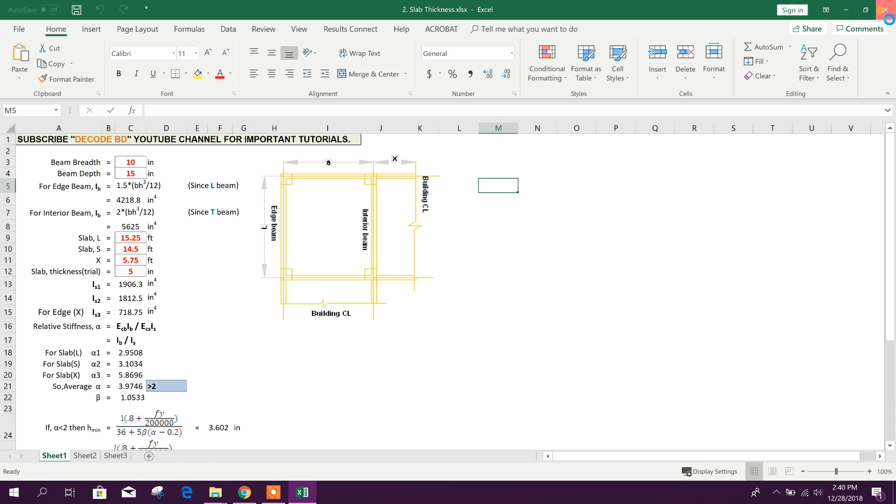Here's this one, checklist for ETABS. Number 2, determination of slab thickness. Number 3, water tank load calculation. All these Excels I have used in my tutorials. Wind load calculation. Here this one is a little bit updated for 0 degree and 90 degree according to ETABS input.

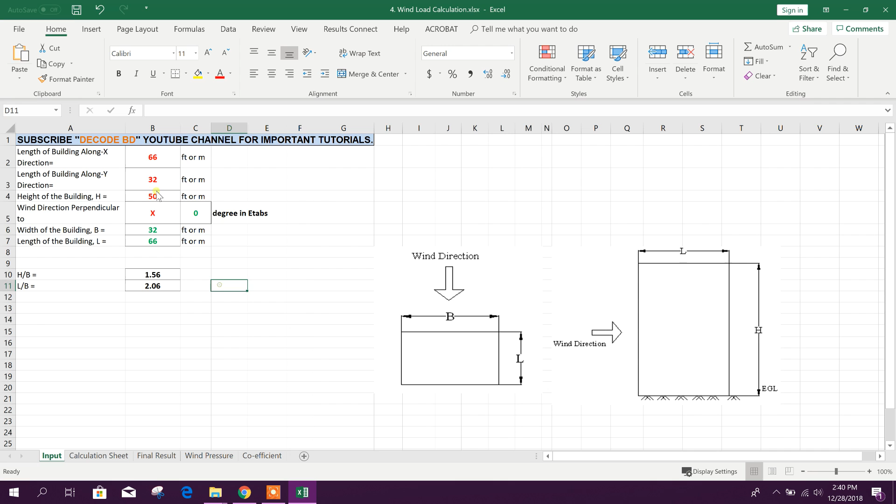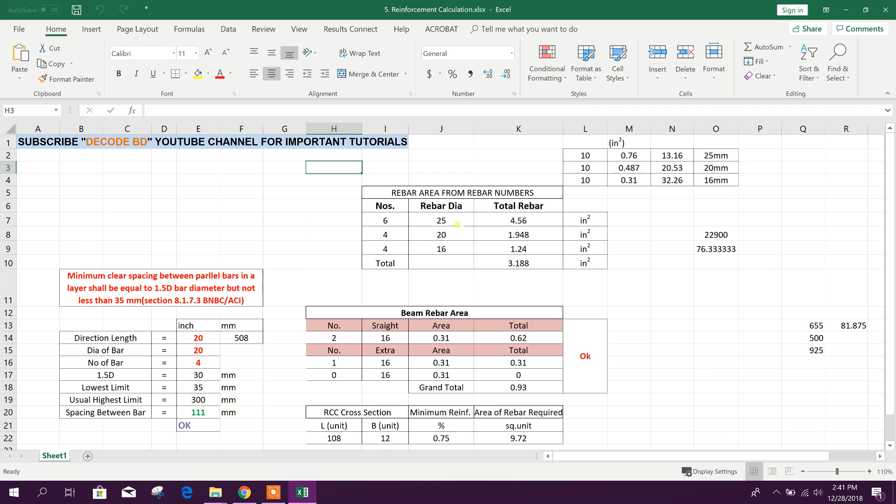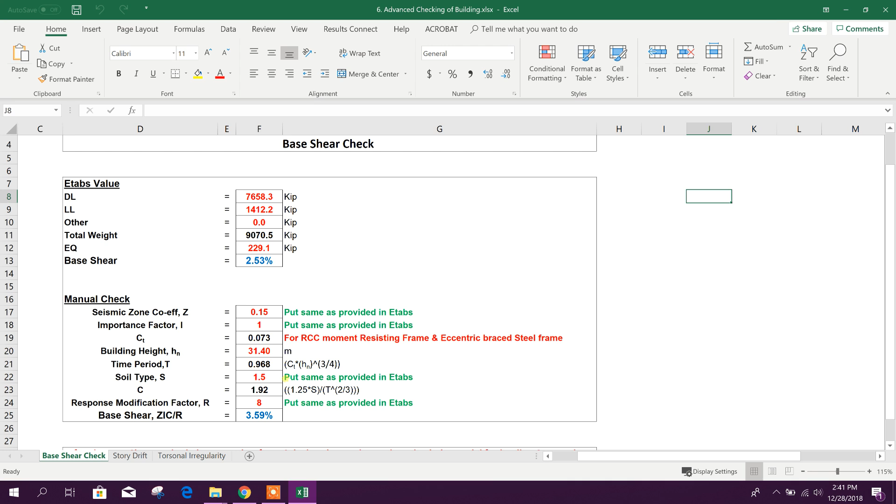Okay, reinforcement calculation. From the ETABS result we can calculate the rebar dia, or we can check the number of rebar reaching the required reinforcement or not. Advanced checking of building. Here we will see base shear check, story drift and torsional irregularity.

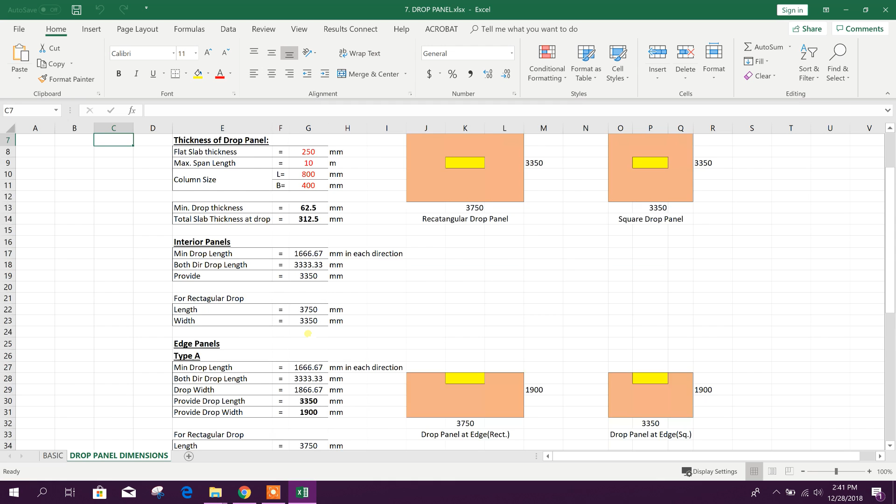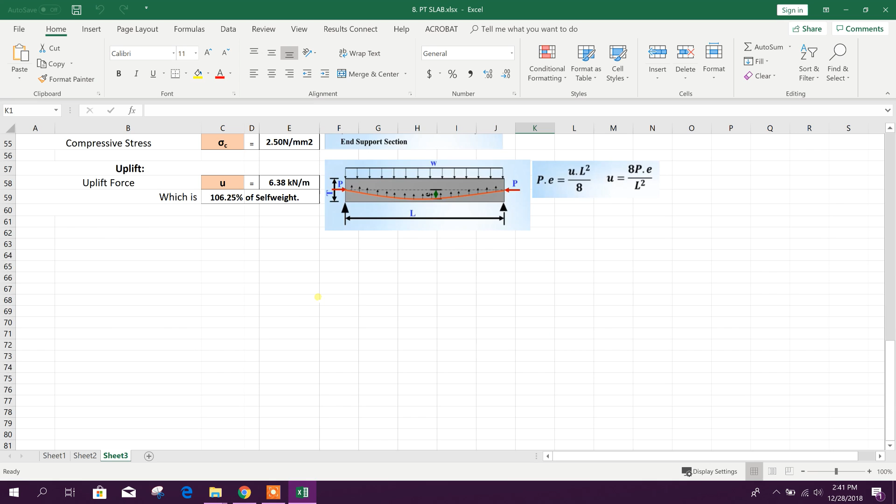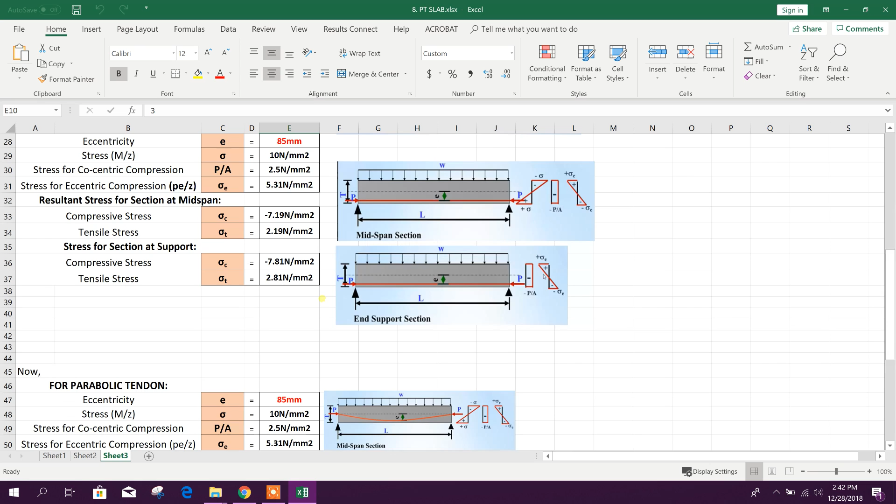Drop panel calculation. This one is for ETABS, we can calculate the size of drop panel and we can provide this same dimension in ETABS. PT slab design. For PT slab design, this Excel I have prepared, and this is a very valuable Excel. That's why I did not want to share, but now I am thinking maybe a lot of people will be happy after getting this Excel, so I am sharing this one.

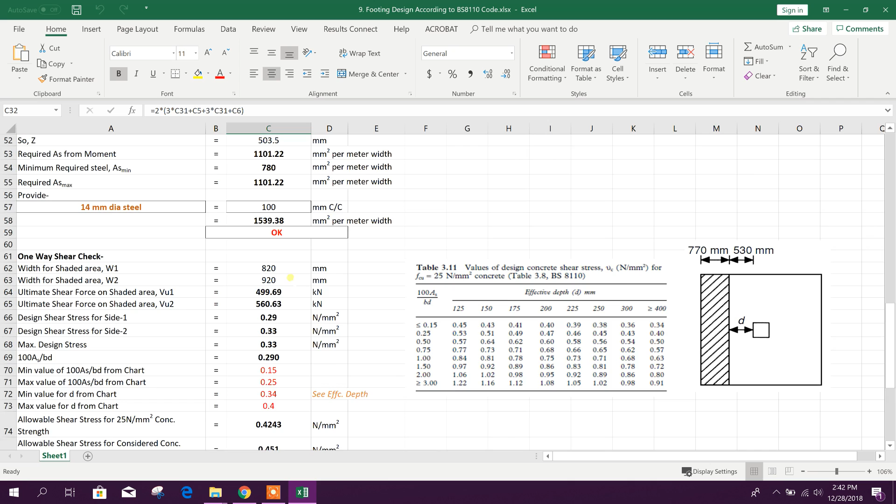Footing design according to BS code. This I have used in my tutorial for Excel preparation, how to create or prepare Excel for design calculation. You can see the tutorial, you will get it in Decode BD.

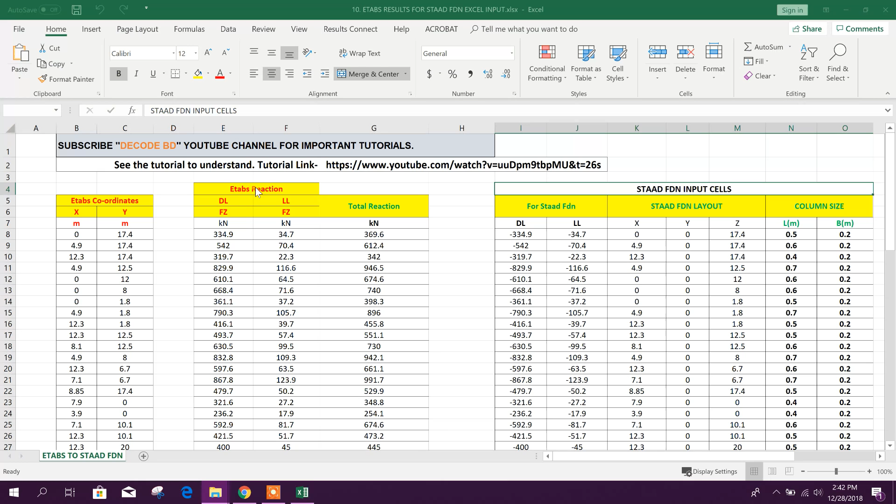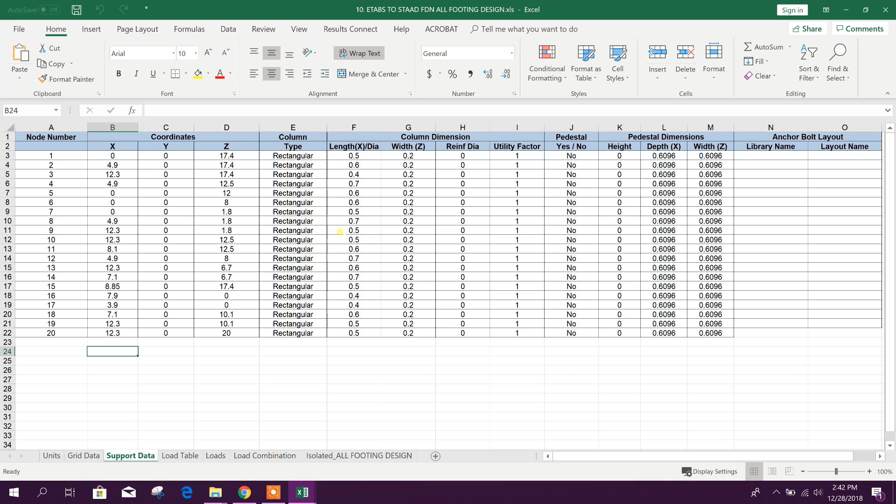And this one, ETABS result, we will arrange here, and then from here we will copy and paste to this STAAD foundation Excel format. Here if we provide the input value and then create an XML file, that file we can import in STAAD foundation for analysis and design of all footings using the result values from ETABS. And this is the reference CAD file for ETABS full course.